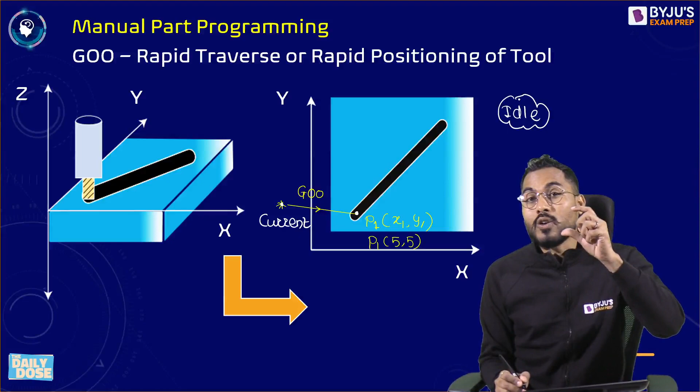It is called idle movement. It is called what? I-D-L-E, idle movement. And such an idle movement of the tool will be controlled by G00. So while covering idle movement, naturally, my tool should take the shortest path and my tool should move with a maximum feed velocity. And that's why G00 rapid positioning of the tool is developed.

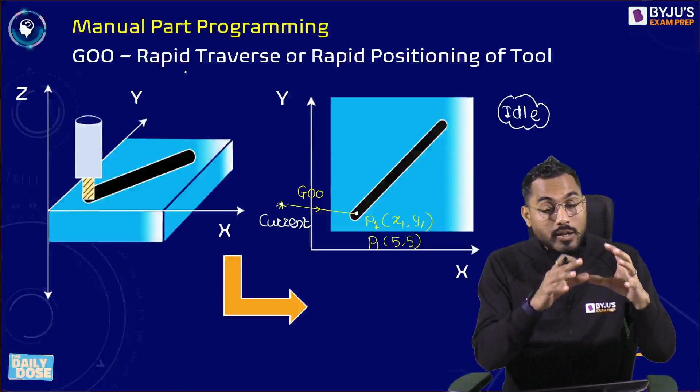But whenever the tool is moving, the tool will take a resultant feed because there will be a certain feed given across the x-axis and certain feed given across the y-axis. So whenever we talk about feed, can I say that in NC and CNC machines, there might be chances that the feed rate across x and y-axis can be different, or the feed rate across x and y-axis can be same. Anything can happen.

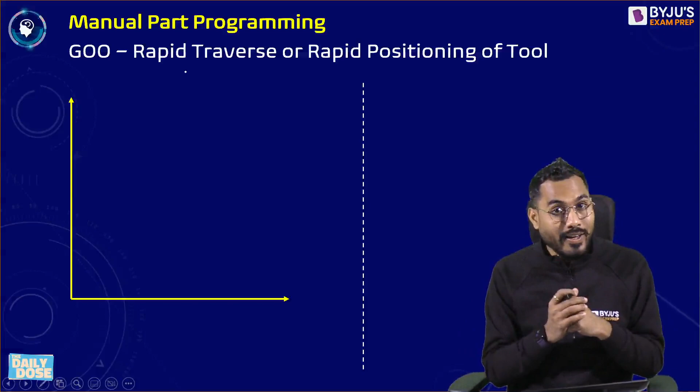And now a beautiful question is coming. Calculate the time required for movement of the tool when the feed rates are given across the axes and the point location is given. Let's take one example that suppose I want to travel to the point P. The coordinate of point P is exactly 50, 25, right? And my tool is there at 0, 0. That is exactly equal to the origin. So at point O, my tool is at 0, 0.

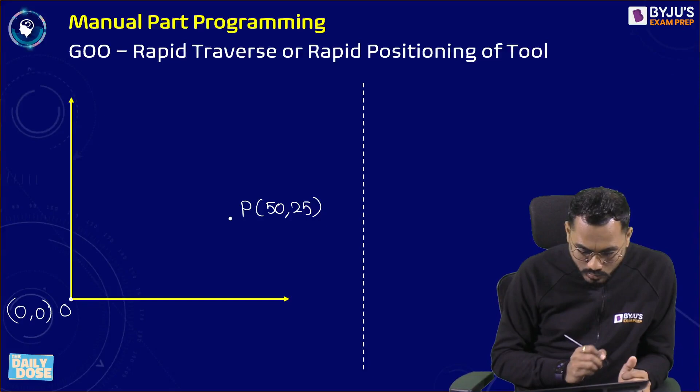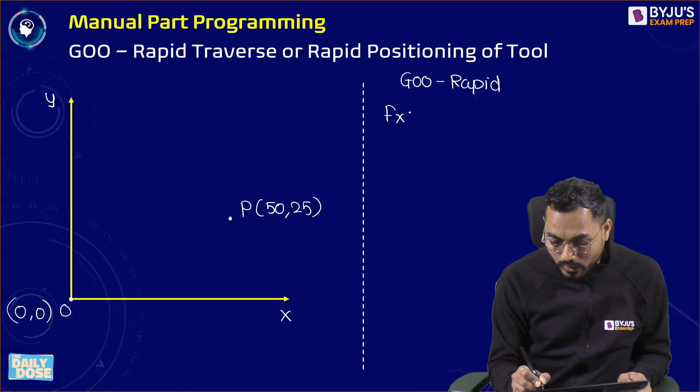I have to travel to this point. And once I reach the point P, I'll start performing the machining operation. So this has to be covered by G00. That is called rapid positioning of the tool. And a certain feed rate is given. So feed rate across x-axis and y-axis can be different or same. So I'm selecting one example here. Feed rate across x-axis and feed rate across y-axis is exactly equal to 25 mm per minute.

Right, fine. Now once my tool is at the origin, initially simultaneous axis movement will be given. So when the simultaneous axis movement is given, the tool will follow a path in such a way that it will cover certain distance across x and certain distance across the y-axis. So after 1 minute, the tool will reach the point where it must have covered 25 mm across x and 25 mm across y. So therefore, can I say that the tool will travel like that? The tool will travel to such a point.

I'll say that the point Q where x-axis coordinate is 25 and y-axis coordinate is 25. So this is the path my tool will travel. This is the path. This is called as resultant feed. Tool will take and travel to this point. How much distance it has to travel across x-axis? 25 mm. How much distance it has to travel across y-axis? 25. Absolutely correct. 25 mm distance it has to travel.

And how much time will be required to reach to this point? 1 minute will be required. Yes, because feed velocity is 25 mm per minute. So this is 25. This is 25. This distance will be covered in 1 minute.

So now if you closely observe, whatever distance my tool has to travel to reach to the point P, the y-axis distance I want to travel is exactly equal to 25 and x-axis distance to travel is 50. So out of that, y distance is completely covered. So I don't require to travel anything about y-axis, and therefore the feed velocity across y-axis will be now cut down, will be now closed.

And now from this point Q, only one axis feed movement will be given, and now tool will travel only across x-axis to the location P. How much is the remaining distance? The remaining distance is 25. Already 25 is covered. So this remaining distance of 25 mm will be covered in 1 minute. So how much time will be required for tool to travel from O to P? Total time of movement of tool is exactly 2 minutes.

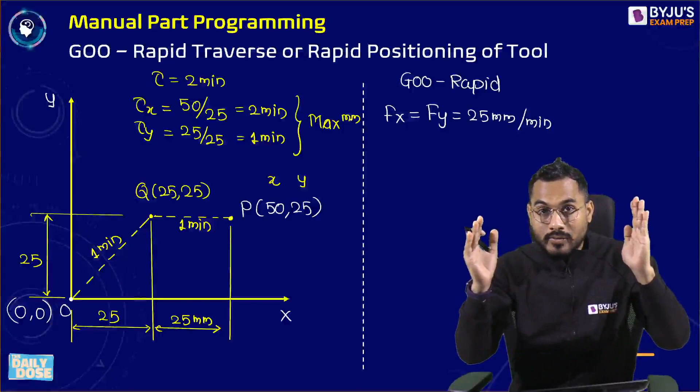So when question comes in GATE examination, you don't require to trace any kind of path. You just see how much total distance you want to travel across X and what is feed velocity. Calculate time to move along X axis, and calculate time to move across Y axis, and whichever is maximum, that will be time required for movement of tool, that will be answer.

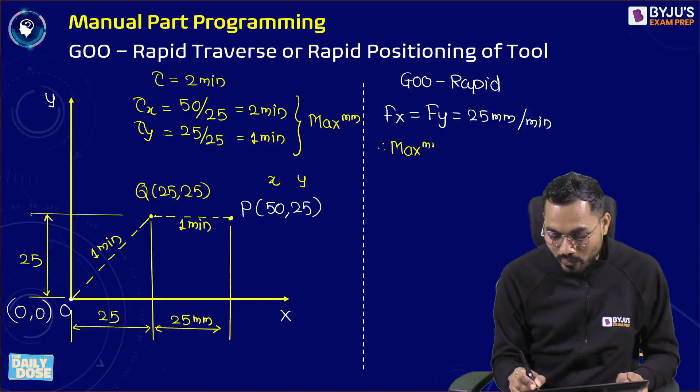So therefore my answer will be time of movement is exactly maximum out of tau x comma tau y. This is the way by which these numericals have to be solved.